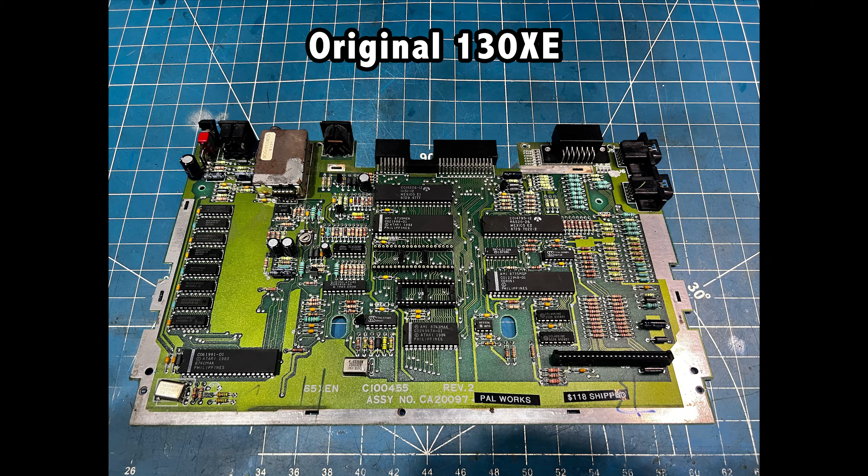I start out with an original 130XE motherboard, and then I remove the GTIA chip and socket, and put a socket in. I remove the ROM chip, put a socket in. And I remove the MMU chip and put a socket in. And then if I'm going to put a Pokey Max 4 in, I also remove the Pokey chip and put a socket there. Then I remove the RF modulator, the video connector, the power connector, and the power switch.

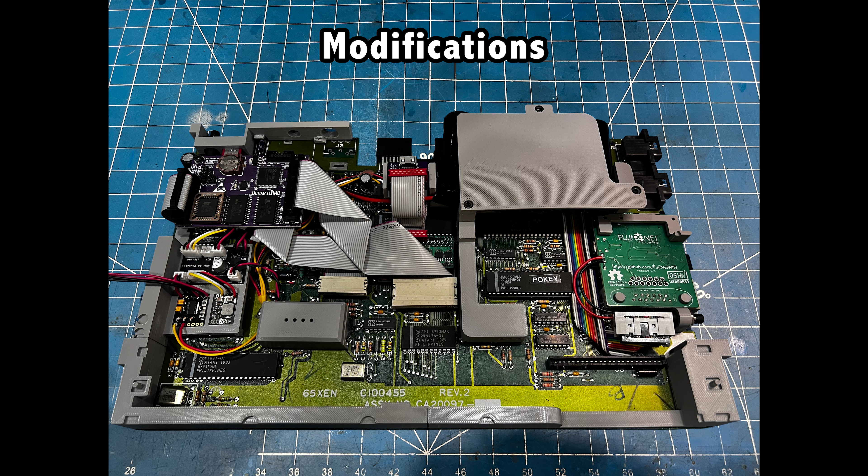After those components are removed and the chips are socketed, I start on the modifications to the board. The first thing I do is hardwire in a cable from the SIO port with a connector and mount the FujiNet onto the board.

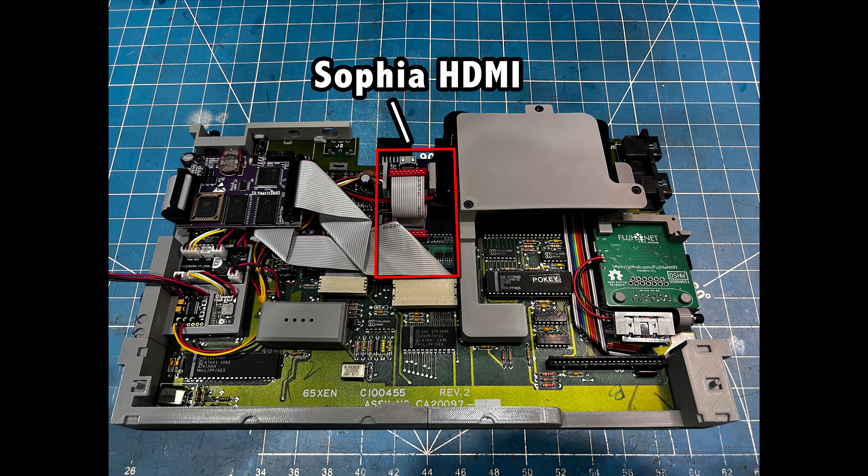Then I install the Sophia 2 video board with a micro HDMI connector. So I have a custom made board that converts the TE connector to a micro HDMI connector for the LCD panel.

Then I install the Ultimate 1 megabyte. I install the power management board with the attached voltage regulator board, and that board converts the 11.1 volt power from the battery pack down to 5 volts for the logic board, the audio board, and the LCD panel.

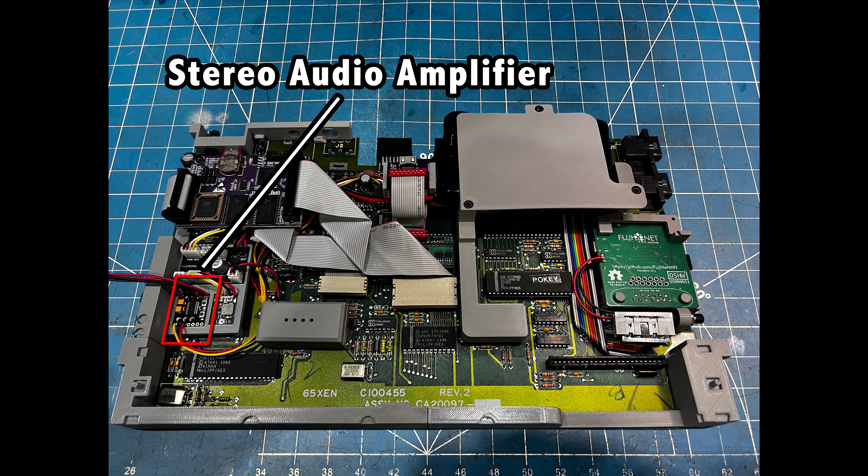I then install the battery level indicator and the stereo audio amplifier and a Pokey Max 4 if I'm going to add that or not. Sometimes I don't put that in. But on this PAL board, I wanted stereo, so I did put one in that board.

I then install the keyboard mounting bracket and the mounting bracket for the battery.

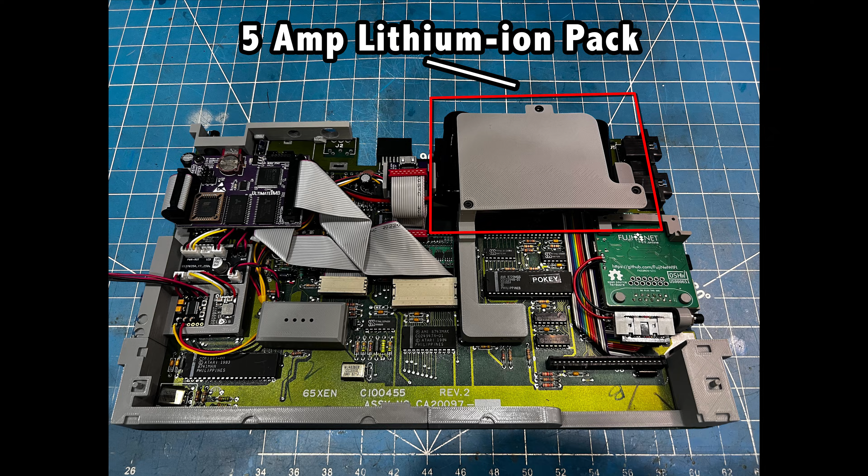I designed the case in Fusion 360, and I'll show you the breakdown of all the components. So here's an image of the main original motherboard. The original board has all these existing holes, so I took advantage of those as much as possible.

So the first thing we do is mount these keyboard brackets onto the board. The pegs here are where the keyboard sits down on. So you screw those brackets in.

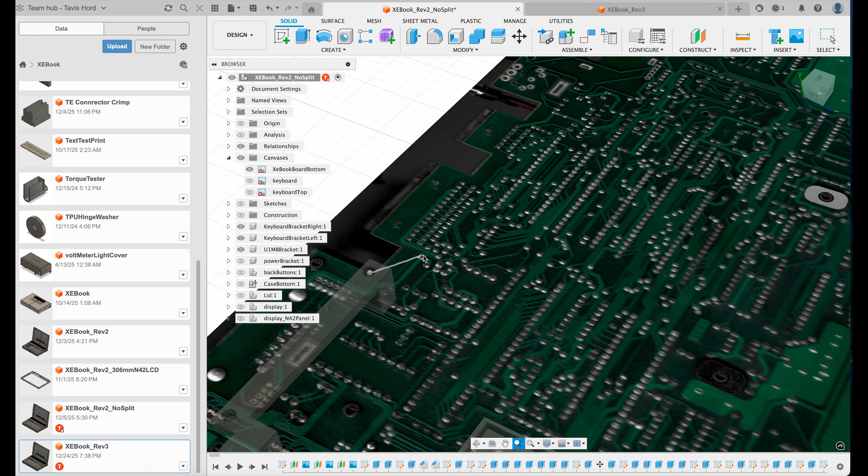Then we have this bracket, and it holds the audio board, the voltage regulator board, and the power management board. And then this bracket here is where the Ultimate 1 megabyte mounts and screws in. Everywhere you see a large hole there is where the threaded inserts go in. Use a soldering iron to push them in.

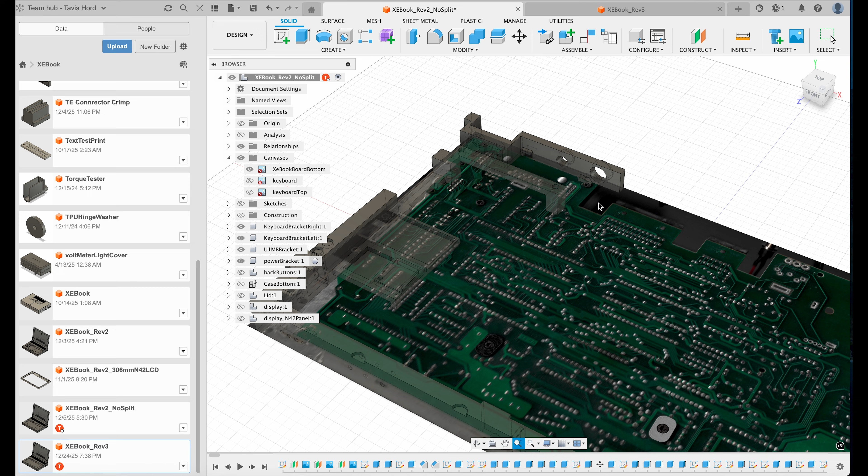Then there's a power bracket. So after you pull the RF modulator out and the power connector and the video connectors off the board, you mount this bracket, and that is what holds the reset button, power button, audio jack, and charging jack. So those mount on there. There's the two buttons.

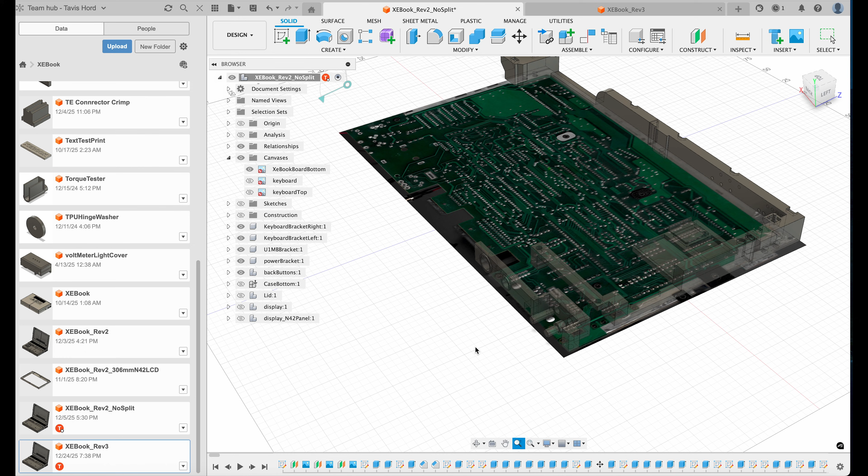Those are 3D printed as well. This is the battery mounting bracket, and it also holds the HDMI connector right there. Here's where the light pipes feed through.

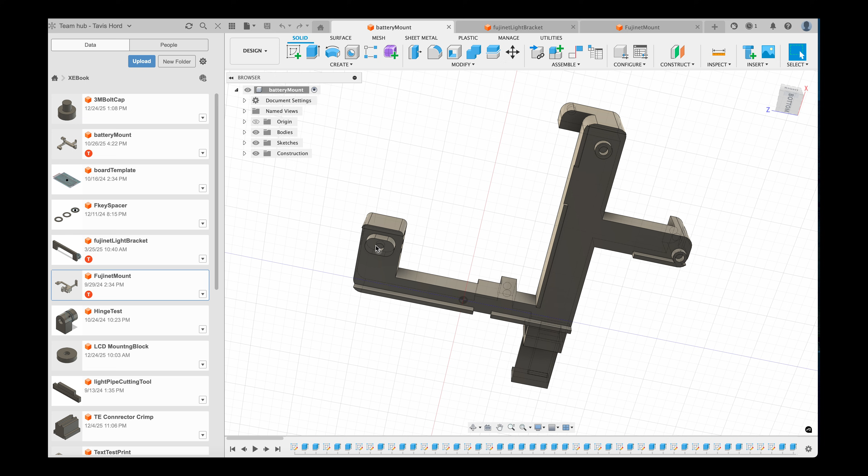Yeah, so this just bolts down in the existing holes of the board from the bottom. Then you drop the battery in here. Then the cover goes over the top like that.

And then we have the FujiNet light pipe mounting bracket here. This slips over the top of the FujiNet, and then these caps go underneath, and then the fiber optic light pipes feed in there.

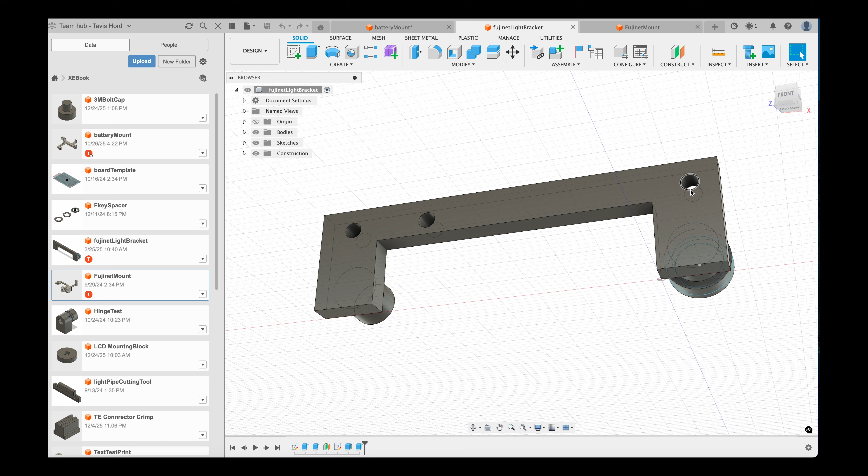And then there's the FujiNet mounting bracket. So the switch screws in here. This button slips over the push button and sticks out the side of the case right there. This part slides onto the motherboard right there.

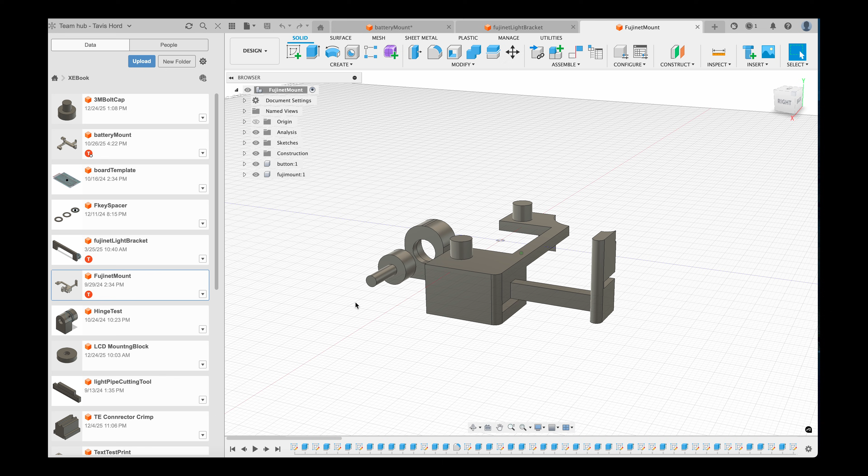Oh, that's the FujiNet board. It slides in there. And then the top of this is for the keyboard, which rests on top of it right there, and it holds the keyboard flat. And that cutout there is for the keyboard screw to miss, so it doesn't hit it. So this helps level the keyboard.

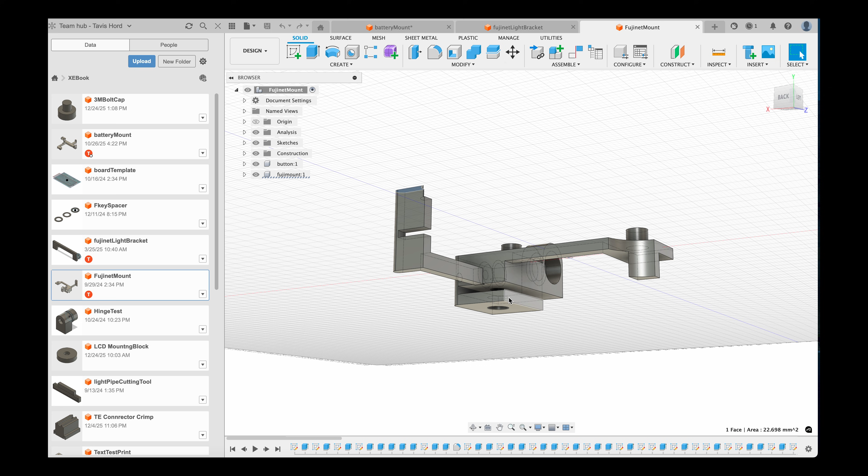The FujiNet slips in there. This slides onto the motherboard and bolts on through the bottom into an existing hole on the motherboard. That's the FujiNet mount. The FujiNet has holes already on it that drop in and hold it in place. Then there's the case bottom, and that's how it sits.

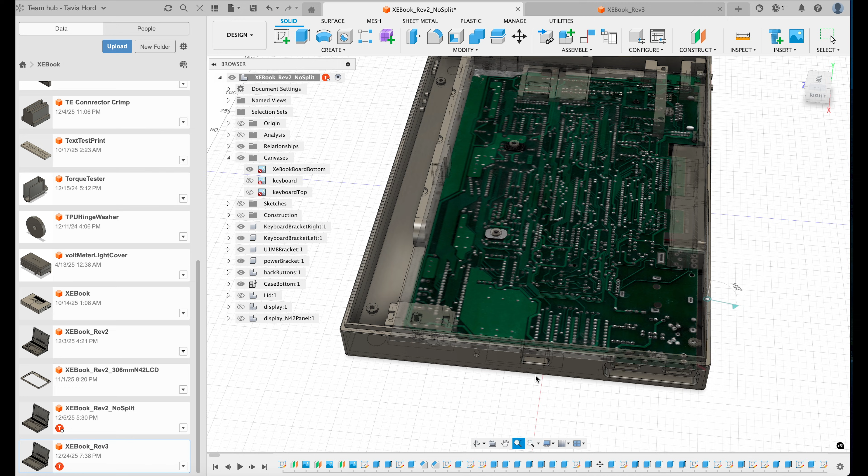All these indicator lights are fiber optic cables that fish through. They feed through here and then go through these holes on the bracket and feed around. That's how that works.

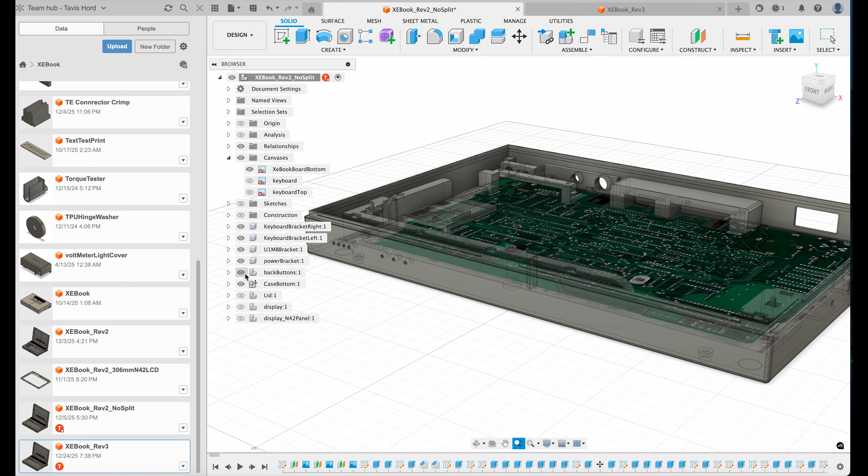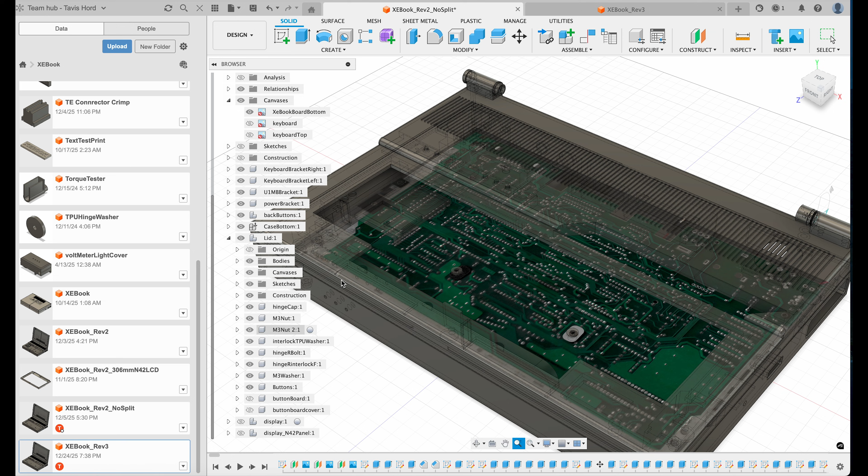Next would be the lid. This is the earlier version, where there was only one tension hinge and all the power and video cables fished through this side. Then the buttons go in there, and there's a button bracket that mounts on there. You can see the underside here - this bracket mount screws in, and there's a circuit board for the button bar that mounts in there.

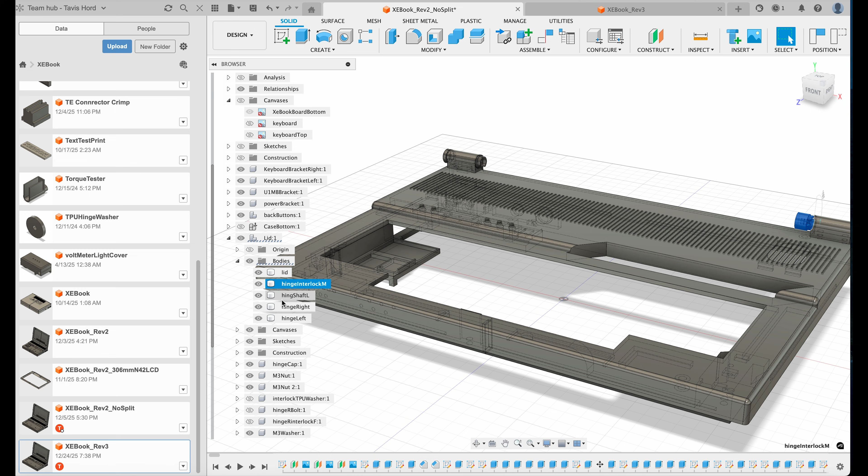In the version 2 design, this piece here would slide in - the hinge shaft, that part. After you'd fish your cables in, you would push and slide this in, which would add a mounting shaft for the display to slide onto and make a smaller radius inside. So you can fish the cables in first - you need the biggest opening to feed the cables through, then you put that in. But this is all gone now in the new design.

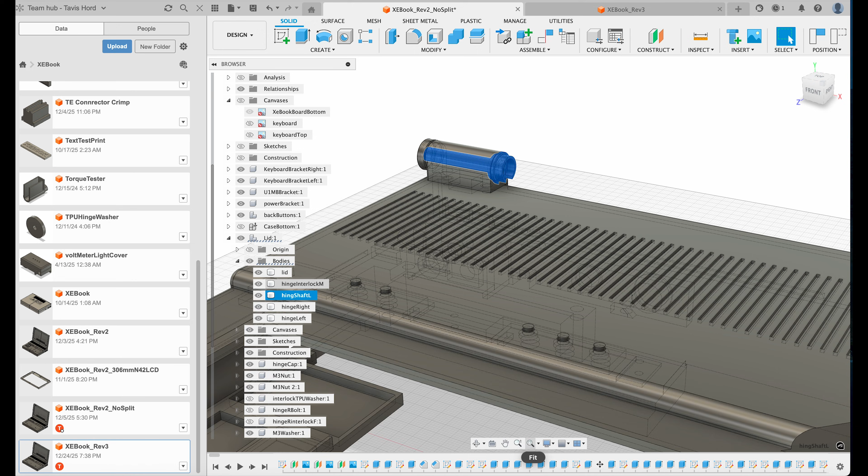Now there's two of these, and they bolt on, so you can remove them and adjust them. They're no longer molded into the case. When the display is on, you can see that this whole centerpiece is on the display itself, so there's an opening there.

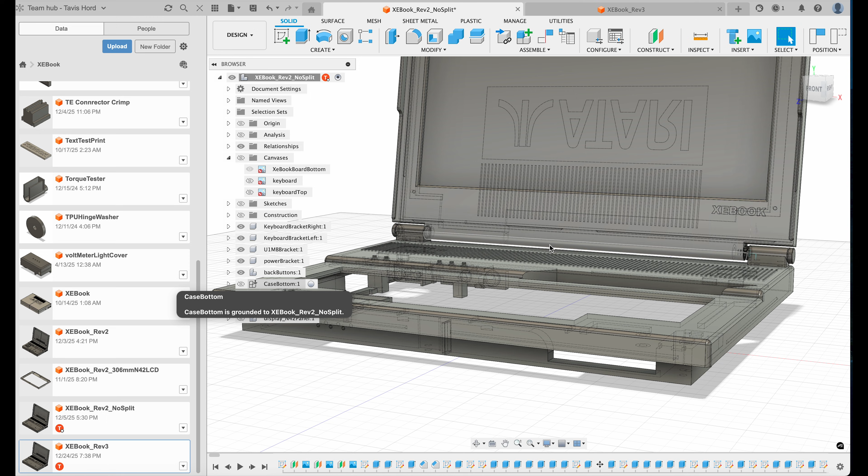This was kind of nice looking because it was hiding where the cables would go, but they went here. The problem with this design was that all the force was over here on this side, and it just made the hinge weak. So now when we switch over to the other design, you'll see that I've changed that.

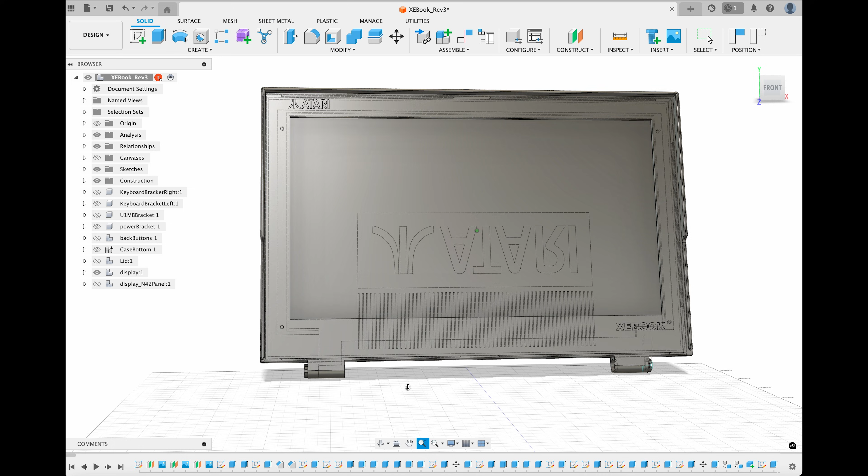Now this is part of the case part, and the lid only has these two pieces here, and now we have these tension hinges. We've got the little tongues on each end that the hinges will grip onto.

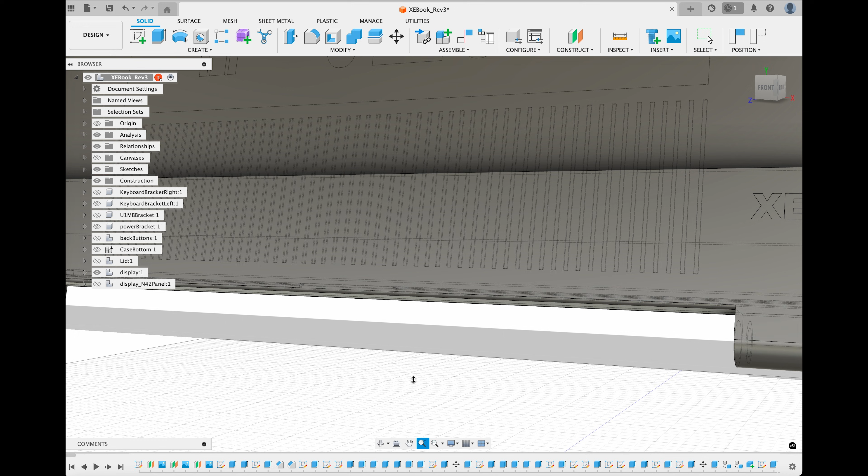This side just has that inset on it, and this side is hollowed out, and then it's cut out so that the cable feeds through for the LCD through this way.

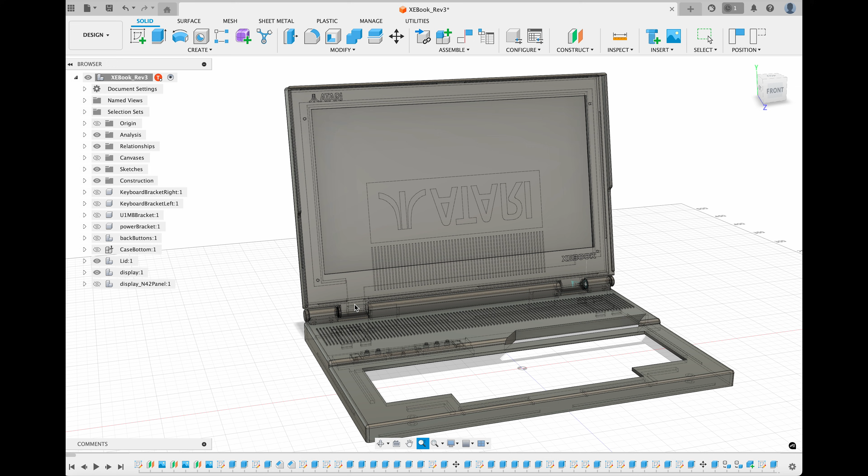It'll drop straight in, so the hinges will be detached when you drop it in. You'll drop the display straight on here, and it's clear right there, so it just slides straight down.

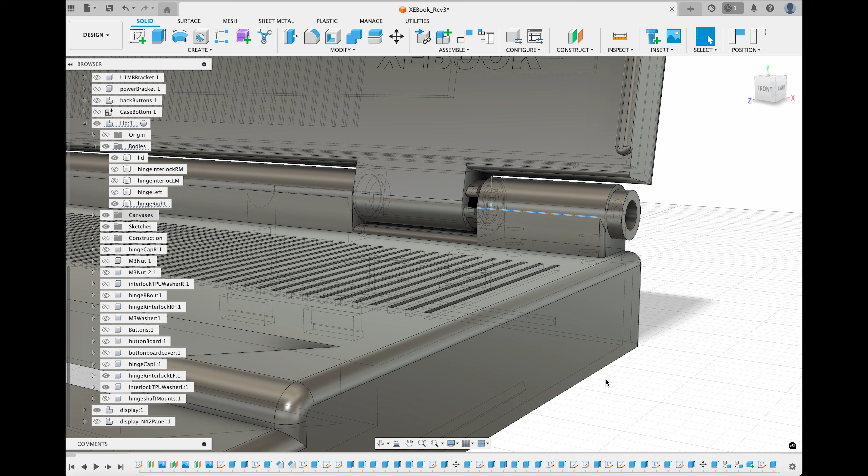Okay, then you'll take a hinge and bolt that on after you install it into the hinge. You'll install the nuts and the bolt. Let's see here, where's the bolt?

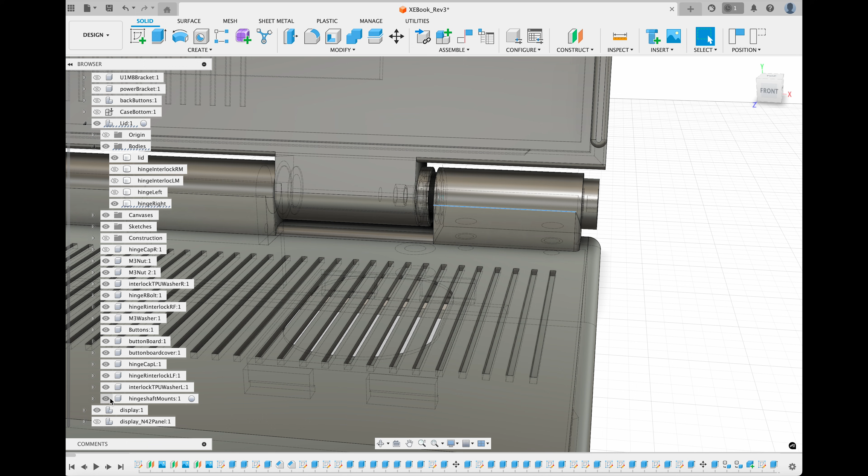Let's turn all these on. Okay. And shaft mounts - there, so you'll have your washer there, the metal one that goes into those tongs there.

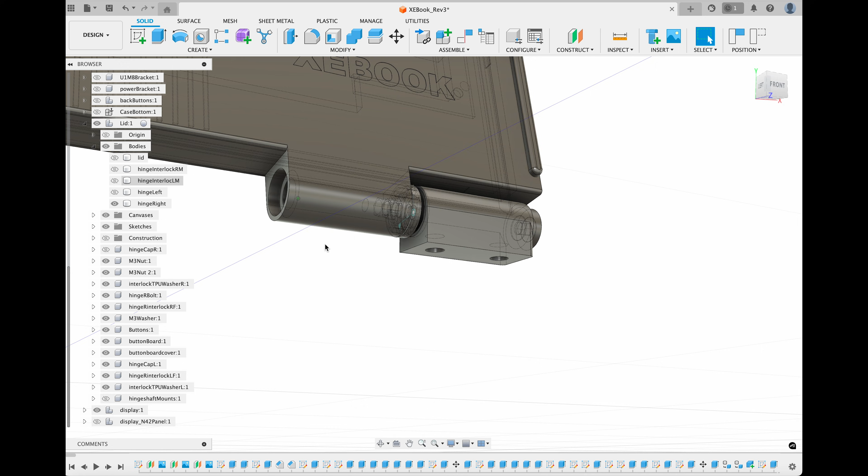So if I disable the lid for now, it'll go like that. And if I turn off this display, there you go. So then there's our tight tension hinge - this thing's hard to turn. And then the display tongs go into those hinges, into those guys like that.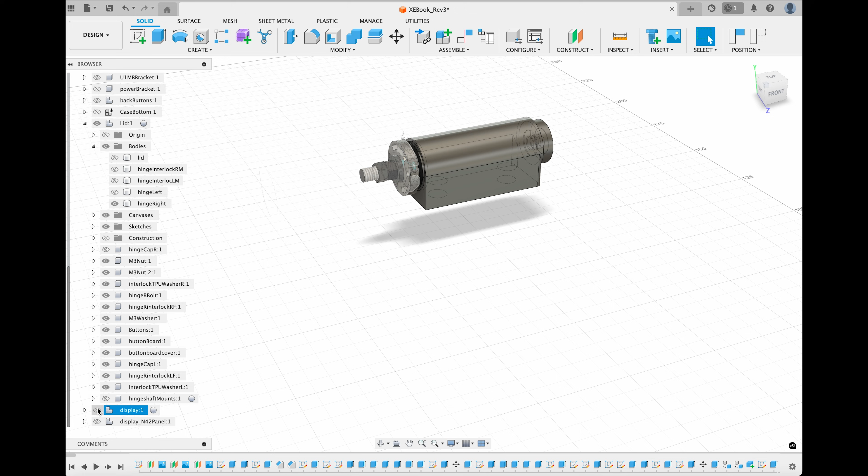That's how that works. So then once you drop the display in and bolt both hinges onto the lid, this will still be wonky in the center here. So we need some shafts to go in and hold that in place after you've fed your cable through.

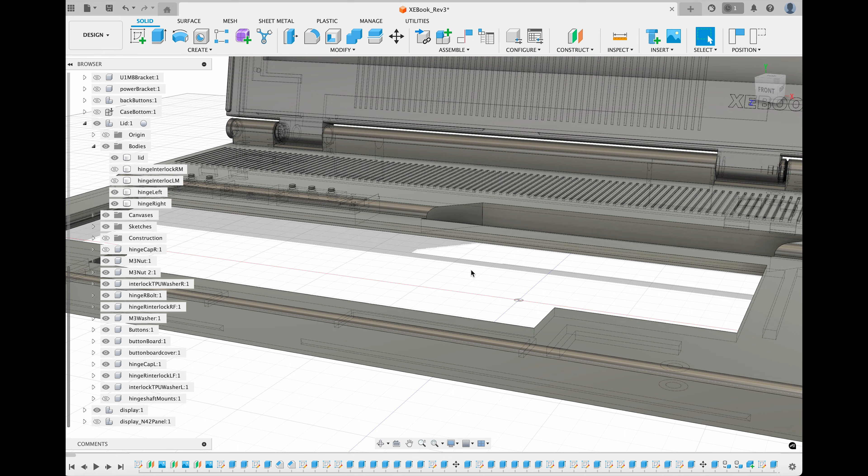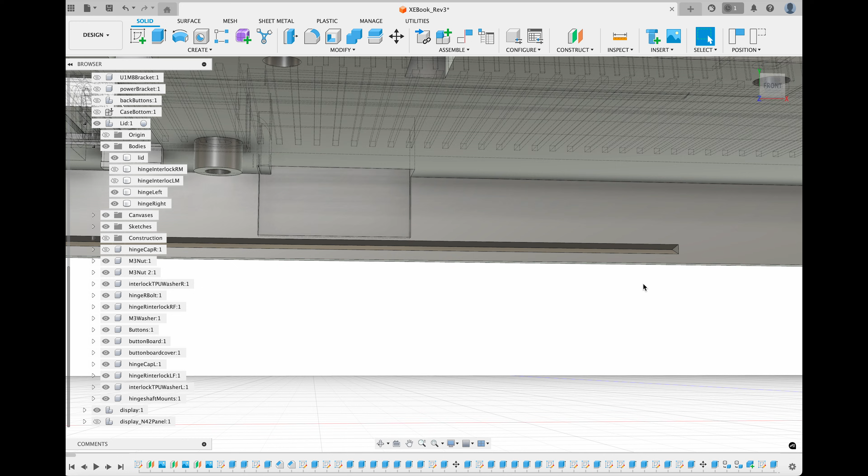The way that works is we've got these hinge mounts here, shaft mounts. You'll take these and push them in this way, and then screw them on each end, and that secures the display onto the lid.

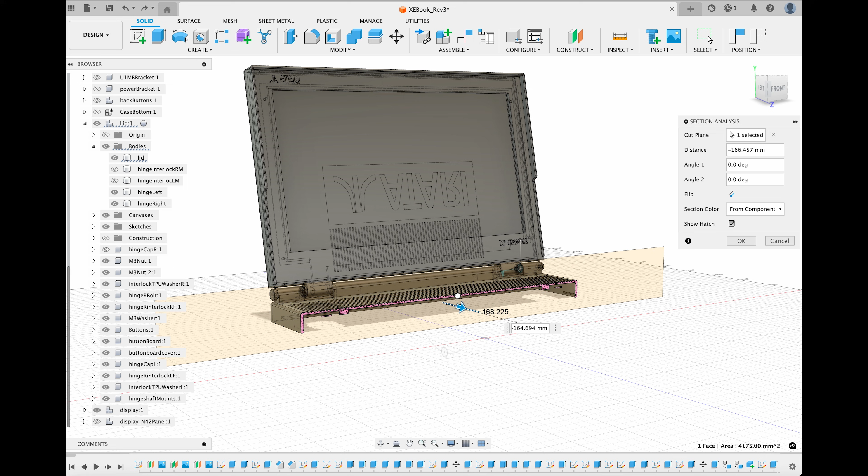We can do a cross section here - section analysis - and see up close how all that works. The cable feeds in through here.

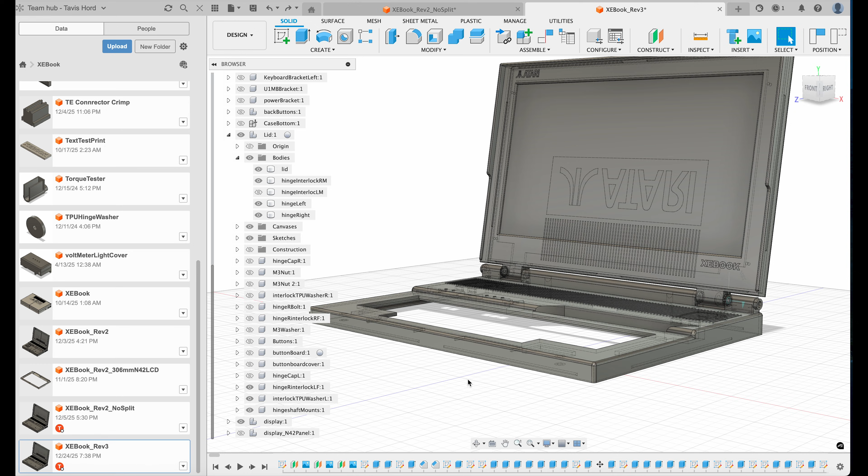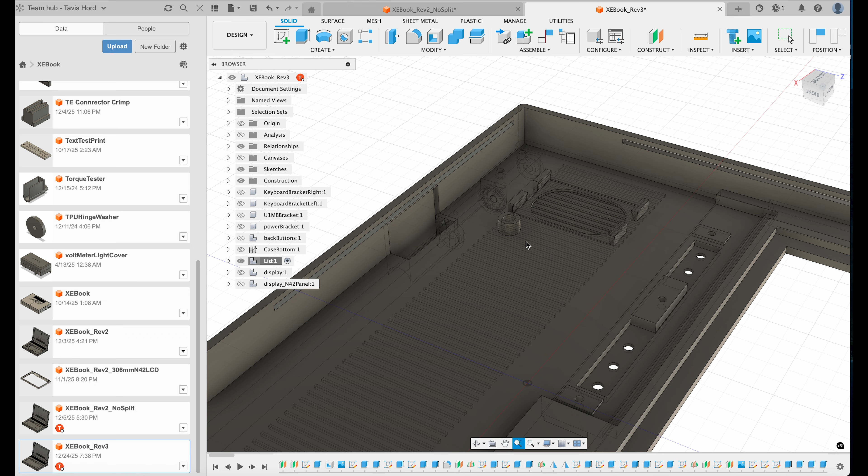Put the case bottom back on. That's everything right there. The speakers have little clips on them, and they just snap into place. Magnets mount here in the corners, and that's what holds the display shut.

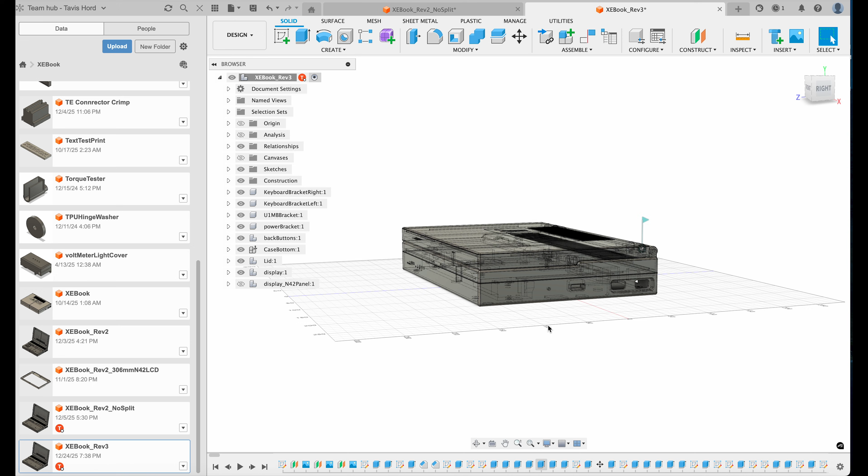Once everything is assembled and put together, there's zero room left, just the smallest amount of gap, because the goal was to get this to be the same height and dimensions, width and depth, as a stock 130XE. So this is the same height as the back end of a 130XE, but the 130XE slopes downward, so the front is still taller, but when the lid is up, this is almost the same.

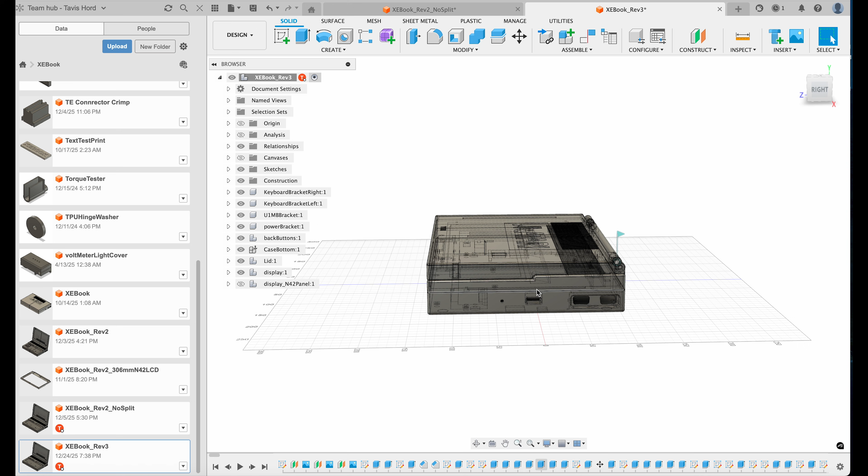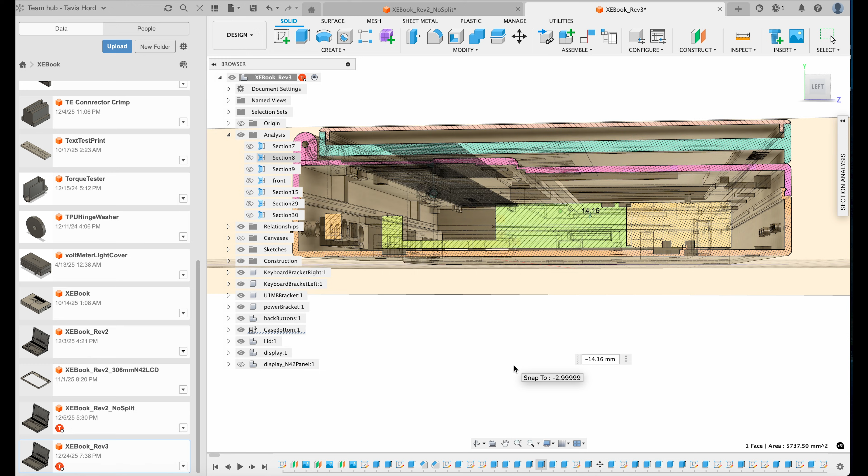We can do a section analysis again on this side to see how tight it is. So you can see the lid. The display just leaves enough gap for the keyboard so it doesn't touch the LCD panel.

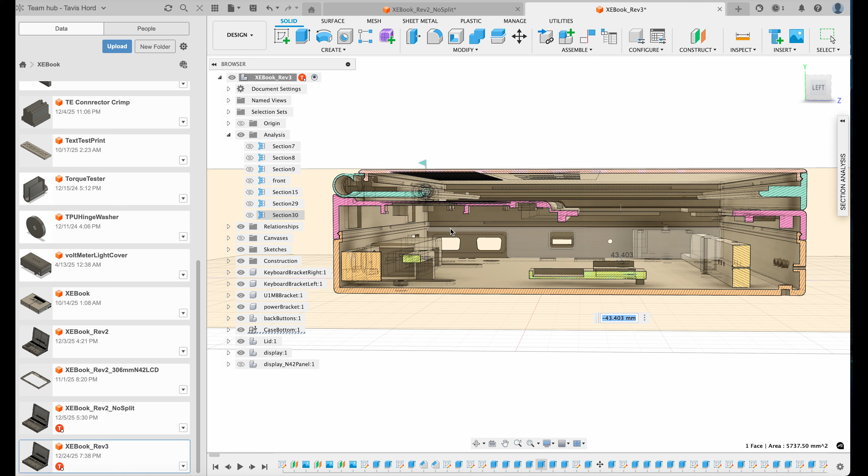And the Ultimate 1 megabyte, when installed — here's the bracket for the speaker, so it comes down — there's just enough room to where the Ultimate 1 megabyte doesn't run into the speaker. So it took a while to get everything as close as possible.

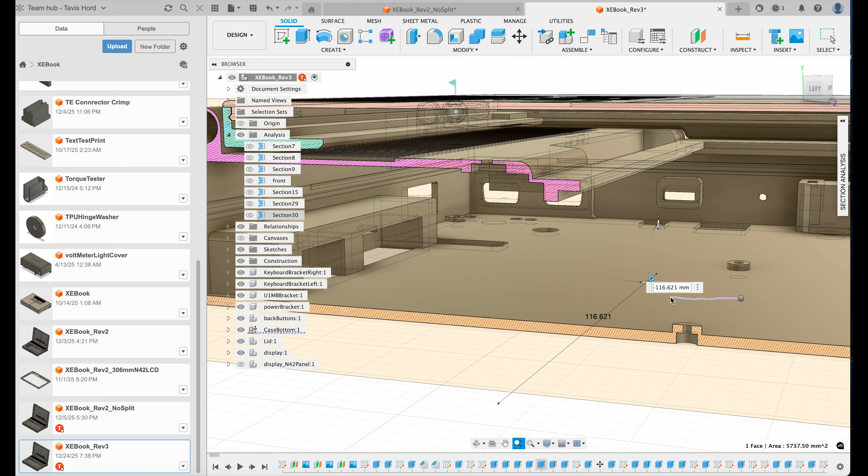Here's the snap, this is how the lid snaps together. You can see that here. There it is right there, the notch, and that goes all the way around. And it's the same as the display up here — it snaps together.

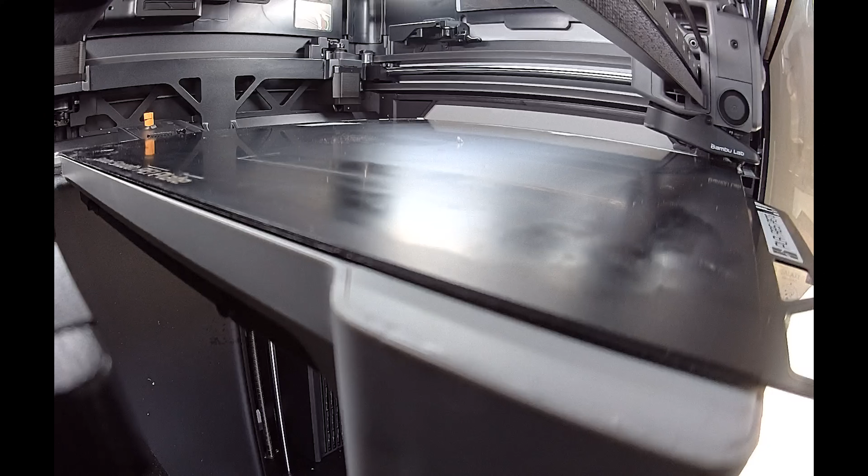I print with 4 filaments: an interface filament between the support material and the part so that they separate easier, and then the gray, the dark gray, and the blue. I print at 0.08 resolution, so each part takes about a day and a half. In total, the whole thing takes about 4 to 5 days to print.

These are volume up and down. FujiNet reset — these are all 3. This is reset, FujiNet reset, long soft reset, and switch discs.

So I'll power on. Okay, we have our status, we're down 2 levels left, so that's each one's about an hour, with a spare reserve hour after all lights go out. So there's about 3 hours left. It's on Wi-Fi. FujiNet came up, and it can load a demo.